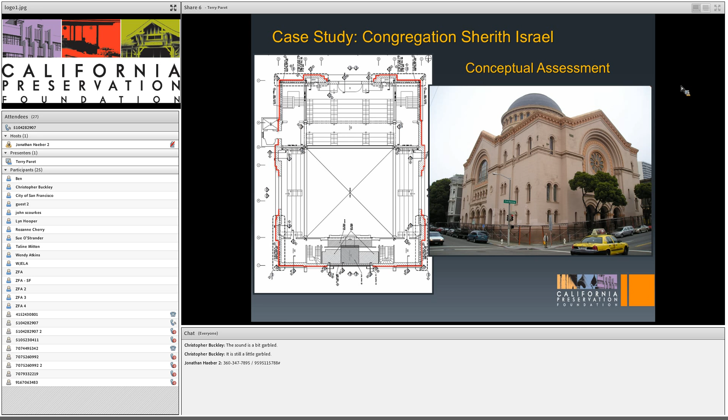This on the left is a plan of the building. You can see that the masonry walls, it doesn't really come out so well at this scale, but 3 of the masonry walls are highly articulated in plan. Because of these articulations, they actually have through-thickness dimensions of around 8 feet, which form structure within the structure. And conceptually, this is kind of what we have. 3 of the walls in the building have these substantial arch-like structures within them, and we can leverage those in the course of understanding how the building works and trying to make it work to satisfy ordinances.

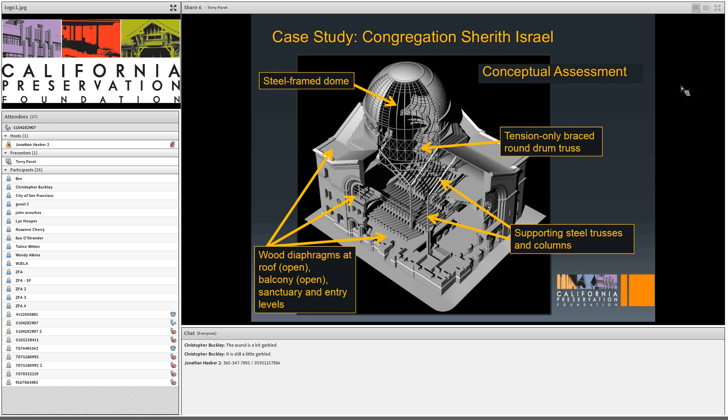This building is also extraordinarily light. While it has a heavy slate roof, the entire top of the building is sheet metal clad. The interior of the building is steel framed, and of course, as I said, is mostly open because it's a big sanctuary. The steel framing is extremely light, and that lightness means that the seismic mass of this building really originates in the walls, not in the floor systems.

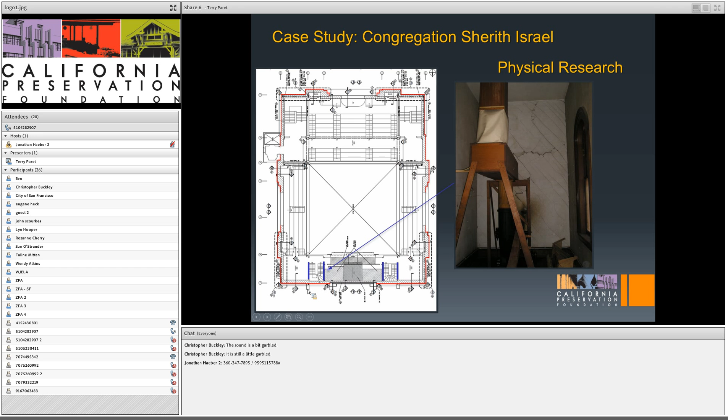We like to use extant damage to confirm behavior. This building, as I said, went through the 1906 earthquake, and it is a living museum. Most of the 1906 damage in it is still there and can be read like a book to help us identify what the critical modes of behavior are in this building. This happens to be a plaster pier, one of four that's shown in blue here, that supports the one wall in the building that is not articulated in plan. This wall stands out as being somewhat vulnerable.

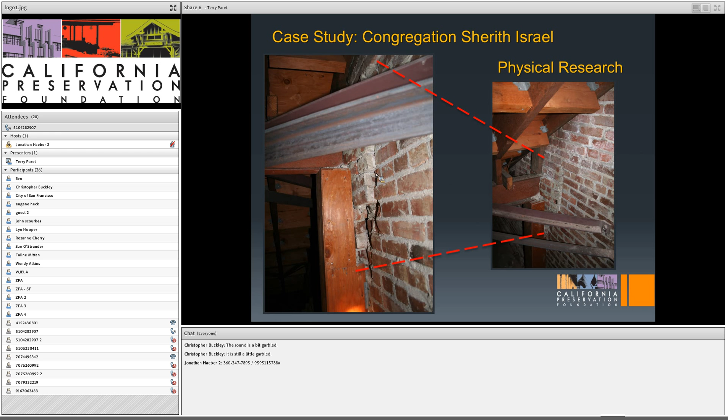In addition, the plaster finished piers in the drum all exhibited damage from the 1906 earthquake. The gable end walls as well. These are photographs of one of the gabled end walls, and we know that gabled end walls in these types of buildings are vulnerable. So this told us really a good deal about the vulnerability of the building.

In projects like this, it's very important to recognize that all extant structure has some capacity, and engineers' preference to ignore certain capacity that's in a building really is not a wise choice when it comes to preservation.

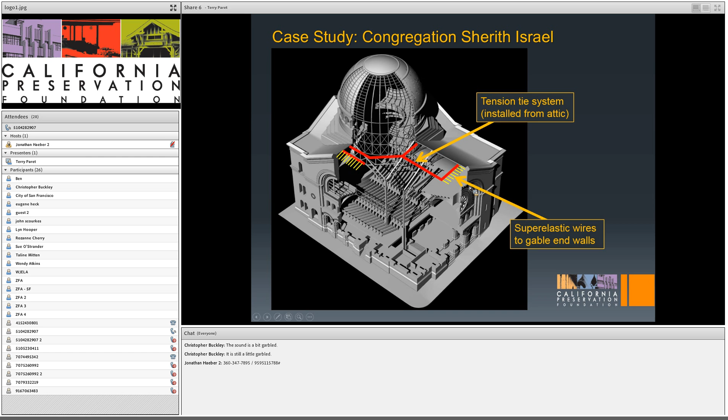The steel tension tie system, just using steel rods, are shown in red, and nitinol superelastic wires extended to the gable end walls. The use of nitinol on this project is, I think, its first use in North America. These schemes allowed us to save the structure, and today it looks just like it looked really before we started.

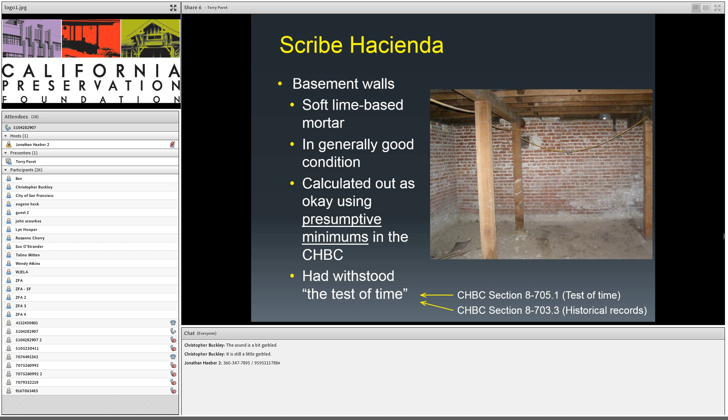There are two provisions in the CHBC. One is 8705.1, which talks about if you have a structural element that has been tested and has been doing well, you don't really have to worry about it. And also, because this structure has seen 3 significant earthquakes, including the 1906 earthquake and the most recent Napa earthquake, there are historical records that we can use. Again, Terry talked about benchmarking. It's the same thing.

The building official was reluctant to allow the presumptive minimum of 9 psi. He wanted testing. And we could have done testing. However, that would have been disruptive to the interior, and it wasn't required by the CHBC. The building official also questioned whether you could actually use that 9 psi capacity to resist earthquake loads. And this is all covered in CHBC section 8-805.1, where it says if you use the presumptive minimum, no testing is required.

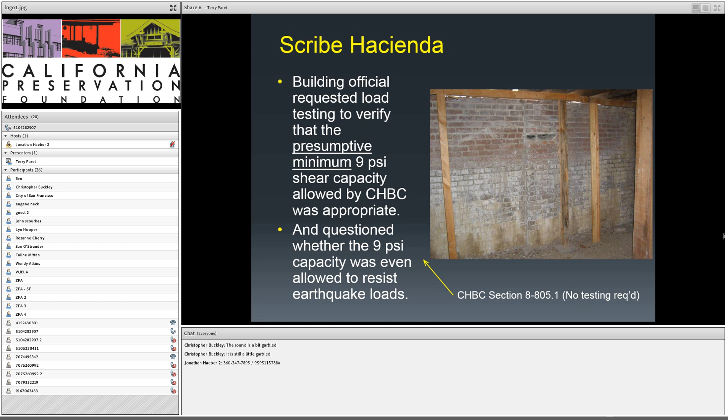So in this case, we went to the board and we asked them to issue a written opinion confirming that, 1, a presumptive minimum does not require any testing. That's the whole purpose of a presumptive minimum. It's a low value that doesn't require testing. And that you can use that shear capacity to resist earthquake loads. The building official's question was, well, it doesn't say you can use it to resist earthquake loads. So we wanted clarification that the building official could hang his hat on that says, yes, it obviously can be used to resist earthquake loads.

And what we got back in fairly short order, they were quite helpful. The board wrote back and said, yes, you can use the 9 psi as a default without testing, and you can use that value to resist lateral loads, including earthquake loads. The request for testing was then withdrawn by the building official, and the CHBC helped keep the foundation work to a minimum level and helped keep the project within the financial reach of the owners so the project could actually go forward.

Another case study, this is the Antelope Valley Indian Museum, and it deals with alterations and operational controls. Well, the operational controls isn't specifically covered in the CHBC, but it's part of using your judgment and broad discretion. The Antelope Valley Indian Museum is in Southern California in the Mojave Desert. It's a sprawling 1- and 2-story structure. It's historic. It was built by H. Arden Edwards in the 1920s, and it was completely not engineered. Mr. Edwards was a set designer in Hollywood, and it seems like he took whatever lumber was extra and brought it out to his homestead in the Mojave Desert and slowly built the structure over a decade or two.

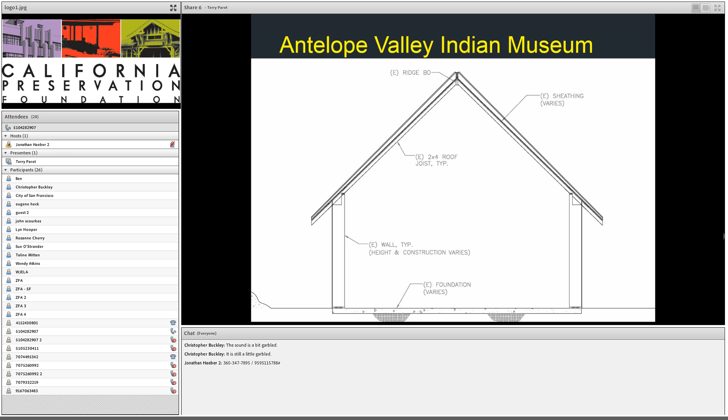The interior of the museum is covered with artwork, so we can't really insulate on the inside. Most of the structure, when you look at the inside, you're also looking at the inside face of the outside. There's no stud cavities. There's very little opportunity to insulate. In this case, we could insulate on the exterior by bumping up the roof. Now this is reversible. It's not immediately noticeable when you go and look now, but we did add extra 2x8s that were tapered, as you can see here, and we put insulation between them and then put new sheathing and re-shingled the roof. The shingles were not historic to begin with.

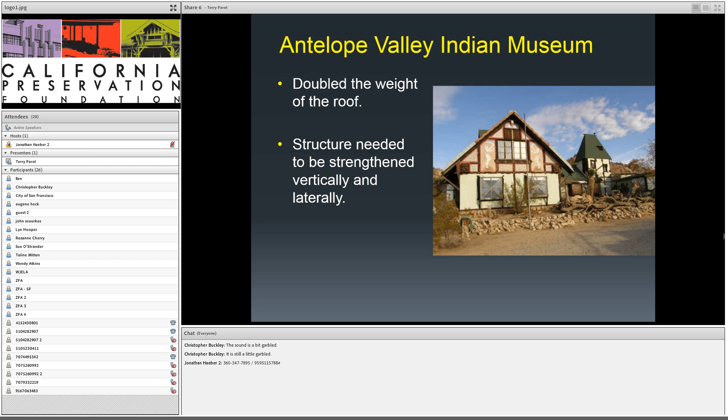As I said earlier, the structure was quite light, and we ended up doubling the weight of the roof just with putting in 2x8s tapered at 2 feet on center and insulation. So the structure needed to be strengthened vertically and laterally, at least to some degree, so that we weren't making things worse. And although we added weight, the CHBC did not require us to bring every component up to current code requirements. We worked with the building official, who in this case is the Department of Parks and Recreation, to come up with a reasonable solution.

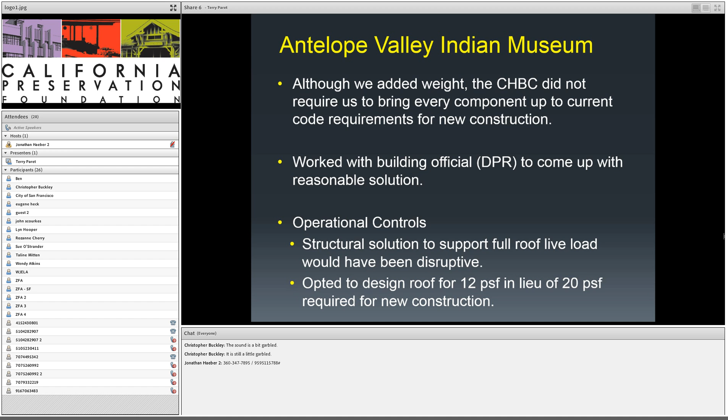In addition, we added operational controls. The CHBC allows you to use judgment. In this case, we could require that next time the building is re-shingled and they have to put a new roofing on it, that they shore it. In this case, we decided to design the roof for 12 pounds per square foot in lieu of 20 to help reduce the impact of adding the weight. And the building official was okay with that. And that was built right into the drawings.

So in this case study, the CHBC allowed judgment and broad discretion on the part of both the engineer and the building official. And we ended up with a creative solution that was within the budget. If we weren't within the budget, the project was not going to happen. And we provided a reasonable level of safety.

I'm going to turn the talk back over to Alan, who's going to talk about the Rigger's Loft. Okay.

This is a project that involved use of the CHBC and rehabilitation of a very deteriorated wood frame structure. The building was undergoing a change in use. It had originally been a shipyard building, and it was not entirely clear what it was going to be used for, but we knew the use would change. And the main use of the CHBC in this project was to make that change in use and do the repairs to the building without bringing the entire building up to code.

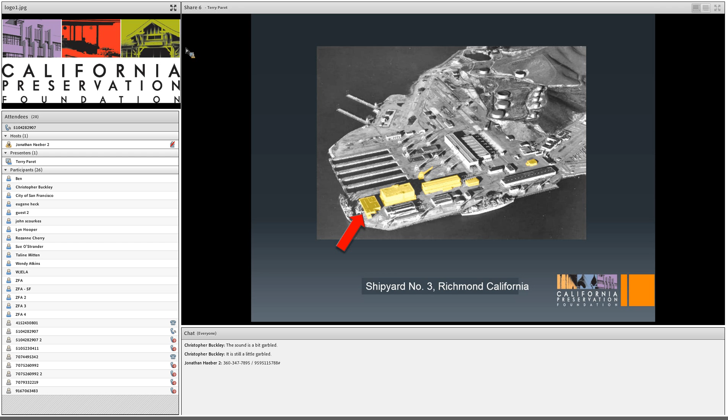This is called the Rigger's Loft. It's a World War II ship outfitting building that was constructed in Richmond, California in 1941, built as part of Shipyard Number 3 by the Kaiser companies to construct victory ships right after the bombing of Pearl Harbor. It's one of only 6 of the original buildings that remain in the shipyard. The Rigger's Loft housed a rigging shop, sheet metal shop, and paint shops, all for outfitting the victory ships. The bulk of the building is wood frame structure, constructed of exposed posts and trusses with a wood stud wall infill.

It had been all but abandoned since its use as a shipyard building. It was in a severe state of deterioration, not only the building envelope, walls and roofing, but the actual roof structure itself. The wood roof members were rotted out over a considerable portion of the building, and the roof had partially collapsed at about 3 locations due to water buildup from clogged drains. The failure had basically been a failure of the bottom chord of the wood trusses, which were under-designed for loads, at least the way we design trusses nowadays.

The paint shop, which is just this corner of the building, is constructed differently. It has four 8-inch thick concrete walls that form the perimeter of the shop, but with a wood roof as well. This held water so successfully that the entire wood roof collapsed. We had nothing left of the wood trusses of that roof.

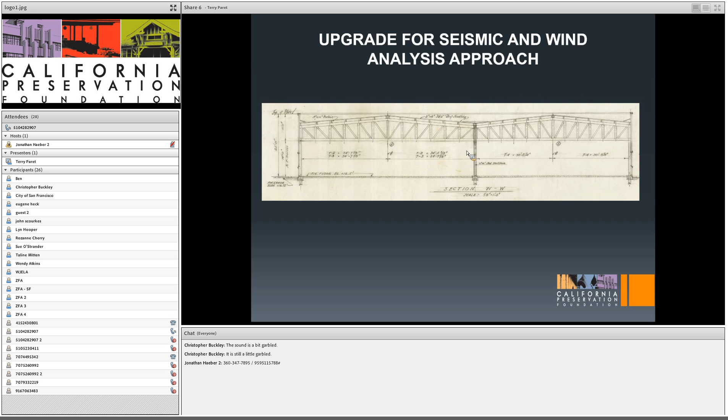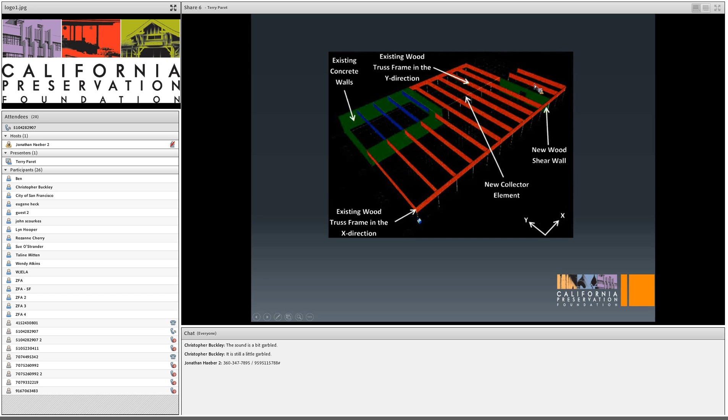At first, it appeared that steel frames might be required, especially in this area of the building that's remote from the concrete box, because of the torsional forces. But we were able to identify one existing partition wall between the sheet metal shop and the welding shop that we decided we could use as a new wood shear wall.

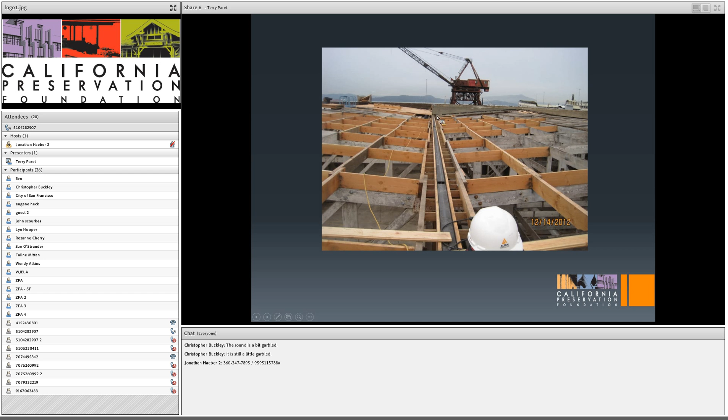So in the project itself, we repaired the trusses in kind and did not upgrade them in terms of their strength. We replaced all the deteriorated wood framing. You can see a mix of the existing framing, which is still whitewashed, and the new framing. This photo also shows the steel tube collector. Here's the paint shop right here. This runs down the center wall of the building, and it connects the roof into the concrete walls of the paint shop.

The use of those paint shop walls, which are over here in the corner, really put a huge demand on the roof, and so it was decided that we needed to actually put down a plywood diaphragm on the roof. We were concerned about doing it because of the roof loads; the live loads on the roof, we actually outdid the Antelope Museum. We calculated those out as only being 7 pounds a square foot.

And so what we did was we did add this weight of the plywood, but we also changed out the roofing from the original built-up roof to a single ply membrane. We were able to keep the weight of the roof pretty similar, or actually a little less. We did actually have to institute programmatic conditions, and those were basically that the roof could not be loaded for re-roofing at any one point. So all the loading was put off-site and roofed from there.

This is the partition wall that we upgraded. The original siding was removed and it was resheathed. New foundation was put in, and micropiles were inserted at the foundation level. We did not sheathe the truss. We were comfortable that the truss could actually provide the shear transfer that was necessary, so we could leave that unsheathed. This is that wall with the siding replaced.

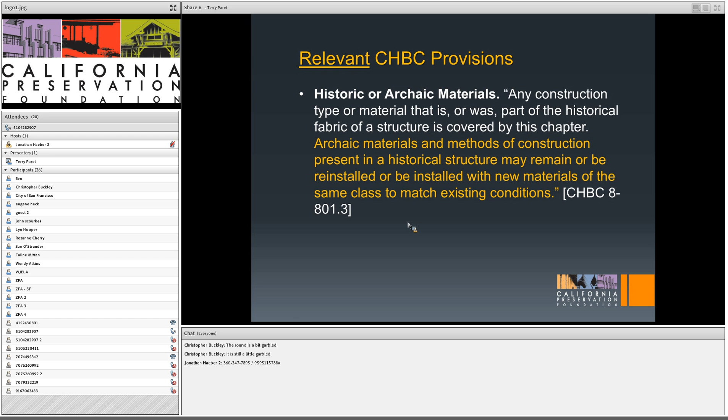Again, a clear statement that there is no intent in the code to trigger work that is not there, and change out of materials, substitution of new materials for older ones. This particular provision on reconstructed walls tells you very clearly that you can even infill existing walls where brick has fallen out. You can replace that brick in a manner similar to the construction of the original walls without conforming to the regular code.

And finally, in the list of relevant provisions that I've chosen to put up here is a section on additional work that says that qualified historical buildings shall not be subject to additional work required by the regular code. In other words, we can rely completely on the provisions within the CHBC for structural repair, to govern structural repairs.

Potentially relevant provisions include this one, which Alan also showed for unsafe buildings and properties. This section says work to remediate the buildings or properties need only address the correction of the unsafe conditions and it shall not be mandatory to bring the entire building into compliance with the regular code. I show in this next slide the analysis of this provision.

The analysis is that we ask the question, do the earthquake-related unsafe conditions relate to locally loose or unstable brick masonry, as in the example that I showed? If the answer is yes, then remediation of the unsafe condition only requires removal or stabilization of the loose, unstable brick. There is no need to do work beyond that to effect repairs.

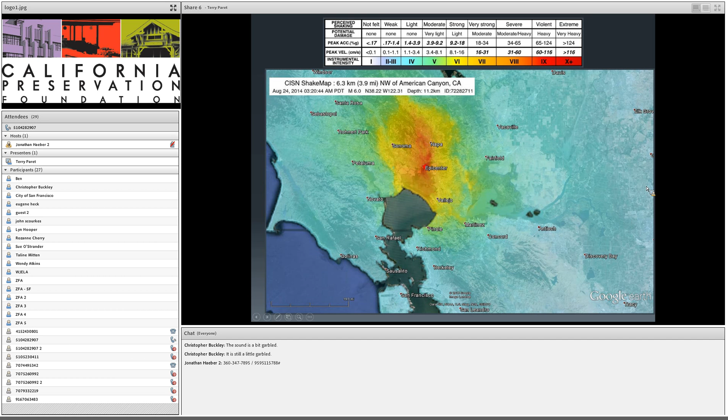To look quickly at what happened in Napa and bring this example home, this is a shake map from the Napa earthquake. As you can see, the strongly shaken region was pretty well confined to a narrow band. This is a close-up of that region, identifying 3 instruments that recorded the intensity of ground shaking. The center one is the downtown Napa instrument. Zooming in on a map of downtown Napa, with the color of the shake map superimposed on the map, I'm showing the area that is downtown. This little dot is where the Napa instrument is.

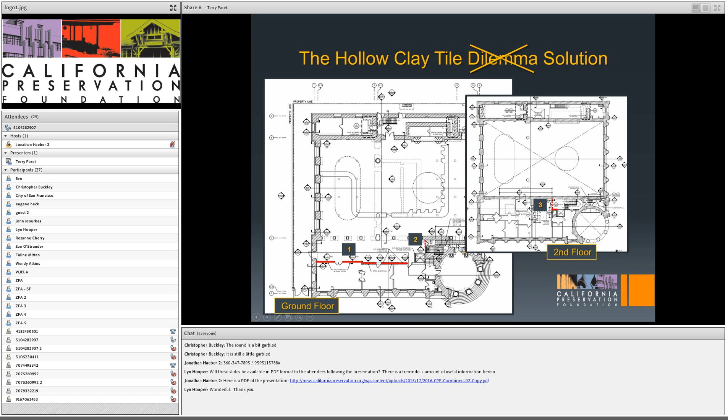I'll be talking about three circumstances. This wall identified as area 1, this header identified as area 2, and this doorway identified as area 3. Area 1 is this single-wythe hollow clay tile wall that runs the length of what's called the customer service waiting area. Here's another view of it. It was going to become a path of an exit way because this window is going to be converted to a new exit.

Amongst the many problems is through these doors are very sensitive historic areas. These are offices. This is a photograph of one of the offices. We did not wish to really damage either the finishes in this room or the hollow clay tile supporting those finishes. In addition, the problem includes the fact that we have decorative metal door frames whose width requires that the existing wall be maintained at the same width that it is today, the existing hollow clay tile wall.

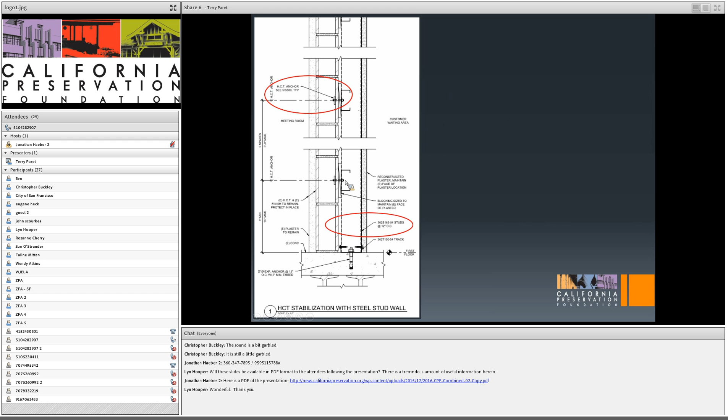We have a marble base that would have to be moved and altered if we altered the width of that wall, the thickness of that wall, and also we have a marble floor tile that would be severely disrupted if we thickened that wall. So what was done was a method of stabilizing the HCT was developed using steel studs and essentially anchors into the hollow clay tile.

This is a view of that work being done. These are temporary wood studs, but here are some of the new cold form steel studs. Here's an image of the hollow clay tile with an HCT anchor through it. This was done as a test. There was blocking installed to maintain the existing thickness of the wall as a spacer.

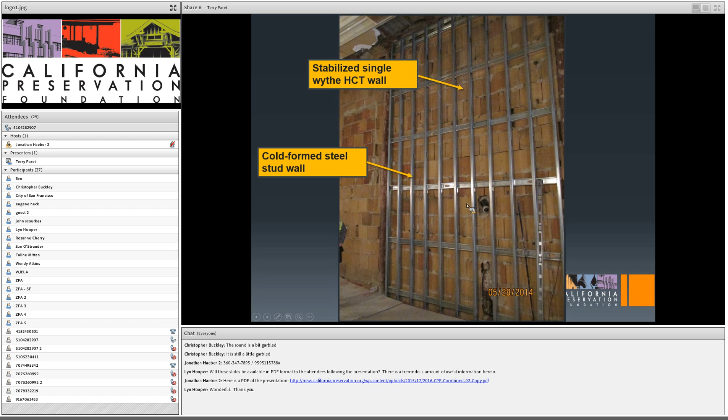This is a view of the cold form steel stud wall after it's been completely assembled and anchored to what is now a single width of hollow clay tile. This was all done without causing any cracks to the plaster on the other side. This wall was dismantled surgically, and it worked. We did that entire wall in this manner that you saw.

In fact, in part of this wall, we actually installed a cold form steel shear wall, which I understand is probably the first one in San Francisco. This is a view of this area today, and the character of it is exactly as it was before.

Area 2, in this view, if you just turned around 180 degrees, this is that single wythe hollow clay tile wall that I'm using for the next example. This dotted line represents the approximate line of a stairway in the backside, which I'll show you in a minute. This is an existing brick masonry wall behind these finishes, an existing concrete wall in this elevator shaft. This is a doorway to an elevator.

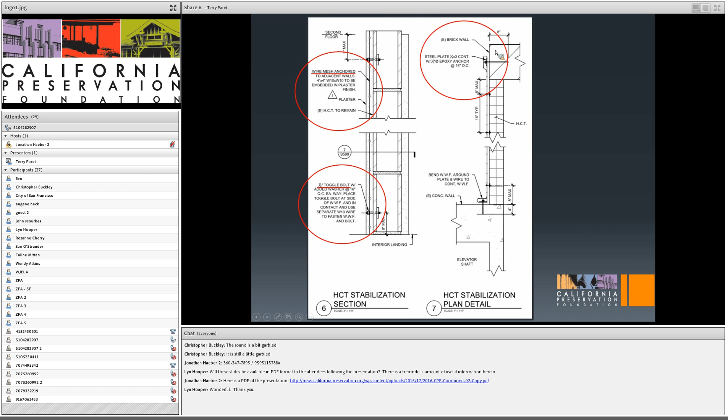This is that stairwell. Where the cursor is, the area blocked out in red is that single wythe wall. You can see why we didn't really want to damage that wall. We have lovely stone wainscoting. Details were developed here in which we put wire mesh on top of this wall, anchored that wire mesh into the hollow clay tile with toggle bolts, and anchored the wire mesh both to the brick wall on one end and to the concrete wall on the other end.

The third example is of this doorway on the second floor that I mentioned, where this is all single wythe hollow clay tile surrounding this door surround, which is part of the egress from the second floor. When you go into the attic above that second floor, you can see the tops of that hollow clay tile wall project into the attic space.

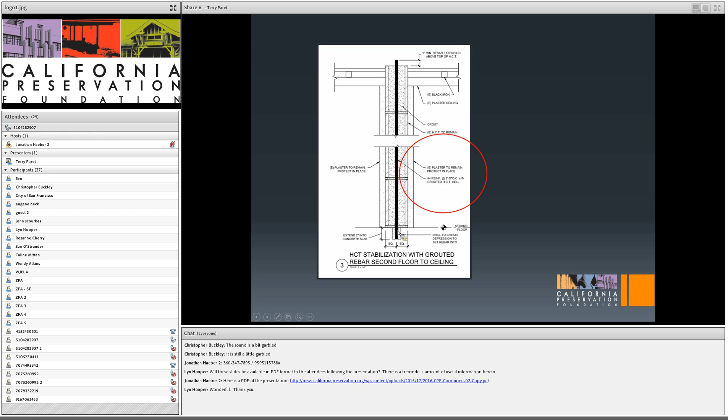And this allowed us essentially to just drop reinforcing steel or threaded rods down through those cells and to grout that material in place to stabilize those walls. Now I will pass the baton to Gwen.

But in 2007, there was a big fire. The fire was extremely damaging in the area of the auditorium. The steel trusses buckled. The roof diaphragm was pretty much destroyed and fell on the seats. The walls were fairly intact. Some of them were maybe a little bit leaning, but most of the structure was actually okay, other than the complete loss of the roof of the auditorium.

So the first question you have to ask is, well, is it historic? There was a cursory study prior to the fire, but after the fire, the school was subjected to much greater scrutiny, and it was found to be culturally significant by the school district's own consultant. The reasons were it had historical and cultural uses. Generations of Hispanic Americans had gone through this high school, and the pre-fire auditorium architecture was also still historic.

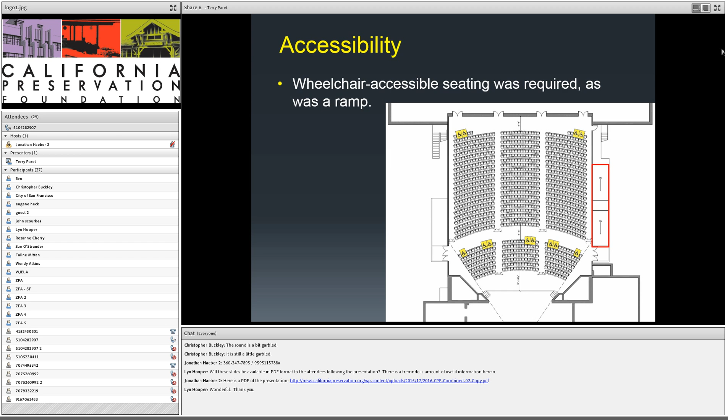In this case, we did need to add wheelchair accessible seating, and we did need to add a wheelchair accessible ramp. We added the minimum required seats. What the CHBC allowed was targeted location of those seats to avoid loss of as many seats as possible. Unfortunately, the district decided that they wanted a newer and larger building, and they ended up just demolishing this historic structure. It took quite a bit of effort to get down. It was actually much more robust than the school district anticipated.

So the lesson of this case study is that the CHBC cannot protect against an owner electing to destroy their building. But for those who are willing, it can eliminate some upgrade triggers and soften others. And those upgrade triggers are generally structural in nature, not accessibility.

I'm going to turn it one last time back to Terry, who's going to finish up with our conclusion. Just a few closing comments about the thrust of the presentation and about this notion, the balance between preservation and safety.

I think we all know, we've all seen projects, historic buildings that have not been saved from the wrecking ball because of perceptions that there was some requirement for major costly interventions that made saving those structures infeasible. I think we also probably have all seen projects on historic buildings that make us grimace because the extent of the work that was done to them caused a lot of damage, and much more damage than was probably necessary.